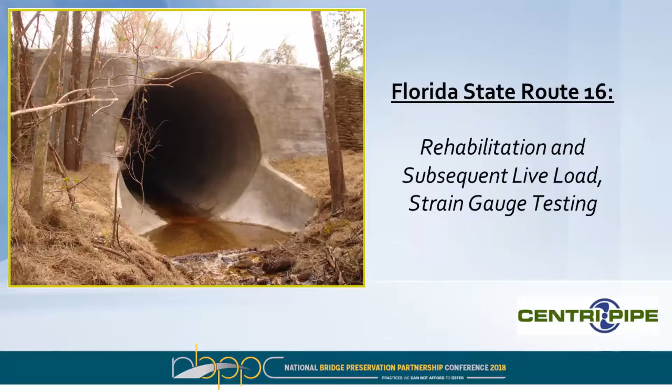The title of the presentation is Rehabilitation and Subsequent Live Load, Strain Gauge Testing, but I didn't really tell you what it was about. You might have figured we fixed something, but didn't really know what. So I'm here to relieve that tension and tell you we're here to talk about culverts.

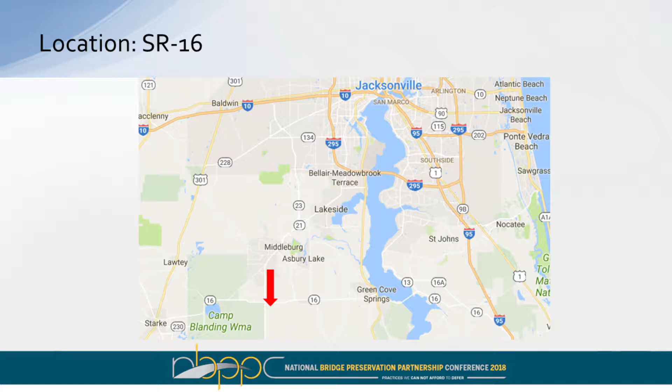One culvert in fact that we worked on 6 or 7 years ago in 2010, out on SR 16, located about an hour southwest of Jacksonville, not too far from here. Back in '08, Tropical Storm Fay crossed Florida and over about 10 days dropped in excess of 28 inches of rain. That kind of rain event will expose hidden or underlying defects in your storm drain system.

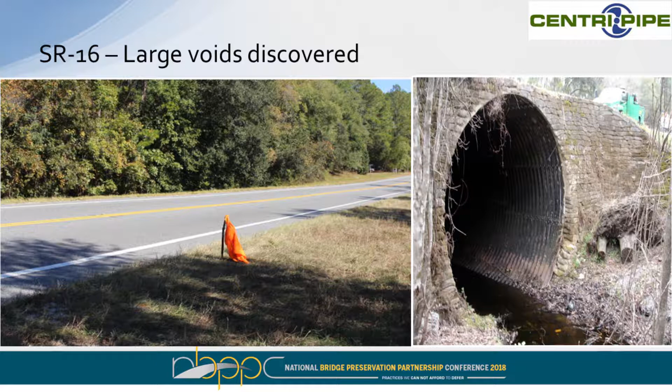This is a photograph of the two-lane rural highway that is SR 16, heavily traveled. The flag you see on the left is top dead center of the crown of the pipe. What's extraordinary about this pipe in particular is that it has less than a foot of cover over the crown.

They discovered the large void, as the story goes, when a state patrol officer stopped over the culvert and was evidently writing someone a ticket. His car suddenly broke through the pavement and landed just right on top of the culvert. At that time, further investigations were done, and they determined there were large voids caused by defects in the invert of this culvert that were piping soils from the upper levels and removing them through the flow in the stream.

So FDOT did a thorough investigation. They examined different means of rehabilitating this pipe, or digging it up and replacing it. Ultimately, to cut to the chase, they selected to use a fine aggregate composite concrete, or FACC, lining to stabilize these defects in the pipe and prevent the soil piping issue that was going on.

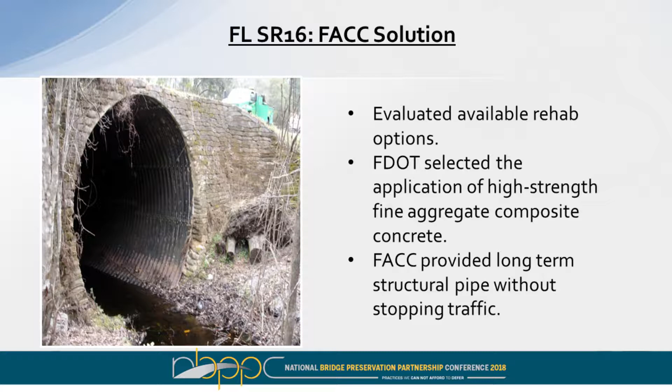Causing instability in the soil envelope around this structure, the main reasons and attributes they chose this solution: it was minimally impactful to traffic flow patterns on this highway—we didn't even have to do a lane closure. It provided a long-term service life with this type of technology, and it's a fully structural, independent pipe within the existing pipe.

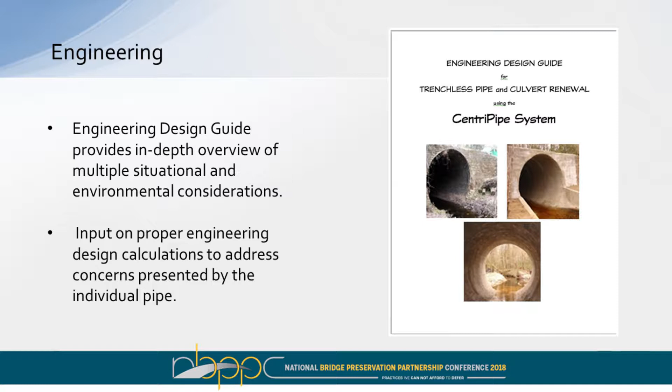So in considering these types of systems, and there are competitive systems on the market, you want to make sure the manufacturer can provide you with an engineering design guide that gives in-depth situational conditions on how to deal with those situations in the environment of the pipe itself. You also want them to provide input on engineering calculations to deal with various concerns present in that pipe's in-situ condition.

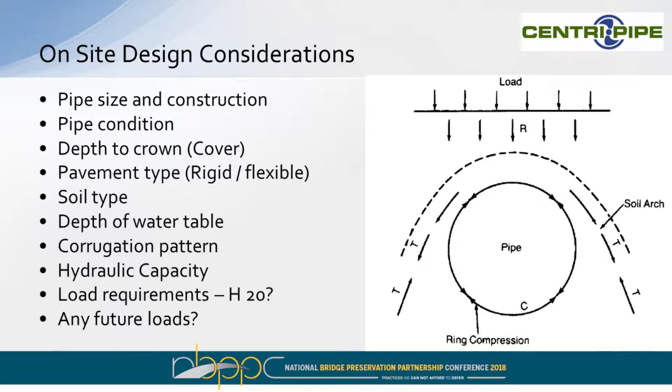So in designing the minimum lining thickness on these liners, we want to look at certain characteristics in the on-site conditions. We want to look at the pipe size, obviously, and construction—is it a corrugated metal pipe? Is it a multi-plate? Is it a reinforced concrete pipe? What is the shape of that pipe? We also want to analyze its current geometry.

It could be deformed. We want to look at the pipe condition, the depth to the crown, and pavement type—is it asphalt or concrete, which distributes live load differently? What kind of soil type encases this pipe? We also want to look at the water table, corrugation pattern, and hydraulic capacity—do we have any capacity left, or are we at the tipping point? And then also load requirements: what is the load, if it's a paved surface, what is it rated for, and any future loads that could possibly be induced on the pipe down the road.

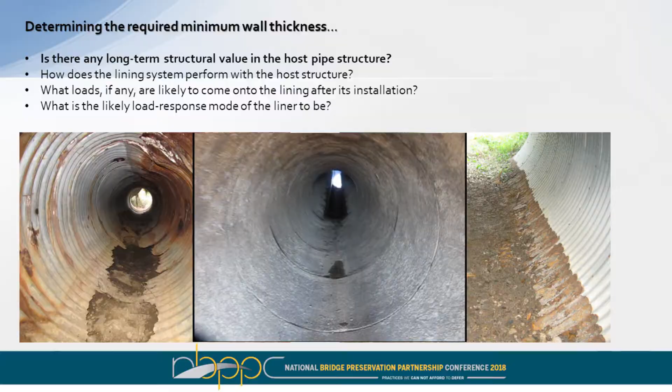So in determining the required minimum wall thickness, we want to see if there's any long-term structural value in the host pipe structure. With corrugated metal pipes, typically we'll use a fully deteriorated design model, so we're not assigning any structural value to that pipe. Even though the pipe may still be functioning in quite a deteriorated state, like the picture on your left, they still hold shape and function for the most part—there's shape holding, in other words.

In a concrete pipe or a brick structure, we will actually, depending on the deteriorated state of that structure, assign a structural value to that structure. So how does the lining system perform within the host structure?

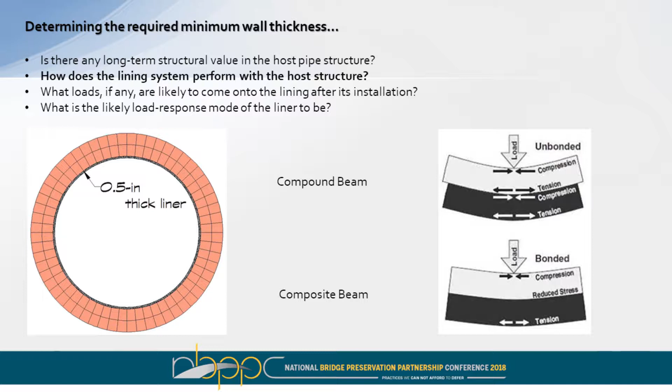Is it going to perform as an unbonded or a bonded condition between the liner and host pipe interface? In an unbonded state, it's going to be a compound beam, which obviously puts more stress on that interface. A bonded configuration is going to be a composite beam and is going to be more stable with less stress between that interface.

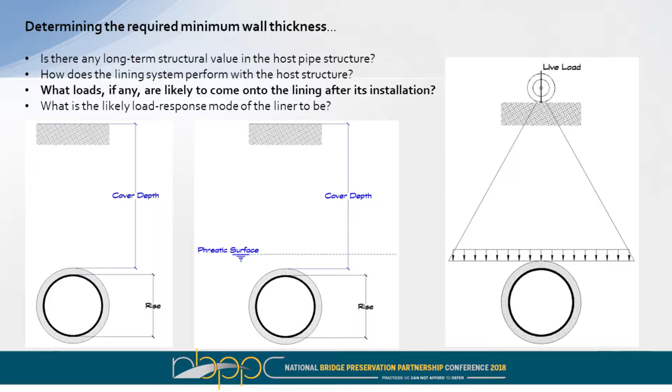What loads, if any, are likely to come onto the lining after installation? We want to look at the cover depth of that pipe and also the diameter or the span. We also want to look at the phreatic surface of the water table because that can also induce pressures on the pipe. And we want to look at and analyze any potential live loads that could come onto the pipe.

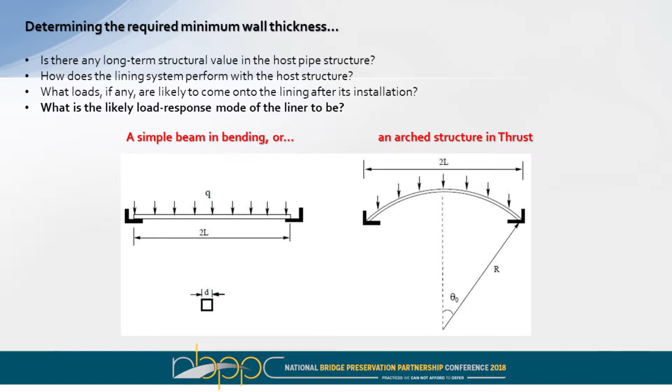Lastly, and probably the most important thing, we want to determine what the likely load response is going to be of this structure. Is it going to act as a simple beam in bending, or is it going to react more like an arch structure and be in thrust? We found that if we can keep our designs in that thrust or compressive stress, we can exponentially raise our safety factors while minimizing the lining thickness and make the lining more economical.

So looking at different FACC lining materials, we want to look at the FACC mix design's physical properties, and these are properties that can be published on paper, but they're black and white. We don't necessarily know how the material is going to perform in the structure itself.

We also want to look at the application methodology. Depending on how you install that material in the host pipe, you can harm or improve those physical properties that you have published on that material. Obviously, we want to look again at the existing soil structure interaction system, and that's how the existing structure is behaving with the soil envelope that it's in.

And obviously determining the loads that will be applied after lining takes place. So we're not really designing a lining inside of a pipe, even though it's typically a thin profile. We're designing a self-independent pipe within a pipe.

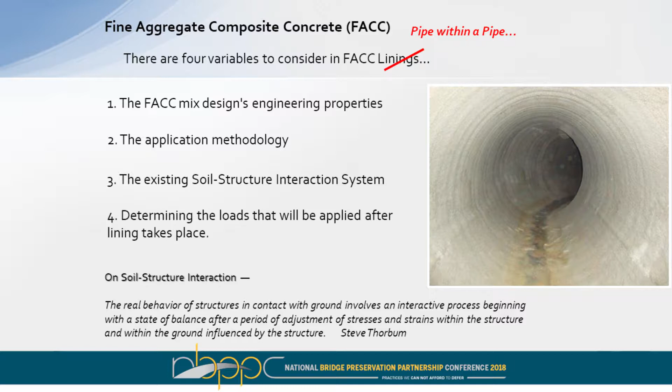On soil structure interaction, I'm going to read you a quick quote here: the real behavior of structures in contact with ground involves an interactive process beginning with a state of balance, after a period of adjustment of stresses and strains within the structure and within the ground influenced by the structure. A buried pipe, when installed by open trench, is going to come upon its greatest stress right after burial. And after a period of adjustment, those stresses should balance out and you should reach a state of static equilibrium.

Some of the physical characteristics that are important in the FACC lining: we want to look at the modulus of elasticity, the flexural strength, the thin shell toughness - and I'll go into that in just a minute - permeability, freeze-thaw performance, the thixotropic nature of the material, and you want to have an internal crystalline membrane technology.

We are talking about a monolithic concrete structure here, so any hairline cracks that could develop over time, we want to have a technology present that's able to autogenously heal those cracks with the presence of water.

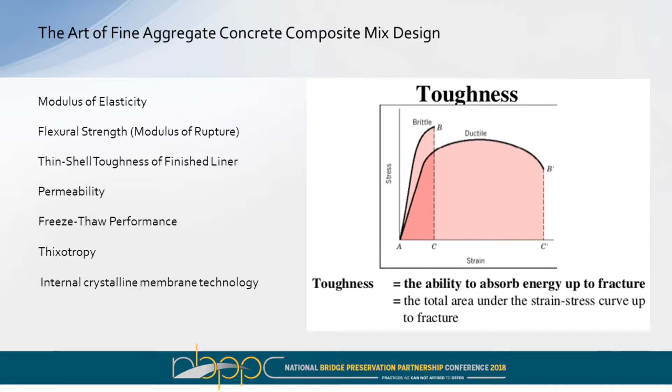Looking at these physical properties, we see in this graph you can have a material with very similar modulus of elasticity, but they behave completely different up to the point of rupture, or modulus of rupture. What we see in a brittle material is a high strength gain, but then once you hit the modulus of rupture point, you have a complete strength loss.

What we want is a material that has some ductility that's able to absorb that energy, and that's how we respond to toughness. That thin shell toughness is the ability to absorb energy up to that point of rupture. That's a better indication of how that pipe or lining is going to function in the ground with a semi-rigid host pipe configuration or in a reinforced concrete pipe situation.

So in analyzing the corrugation profiles in this particular pipe, we had a 2x6 bolted multiplate. The way we calculate the minimum lining thickness is measured off the crest of the corrugation. The material that we use to fill in that corrugation, all of that material in the valleys, adds to the structural integrity of the pipe lining, but we don't consider it in our engineering calculations.

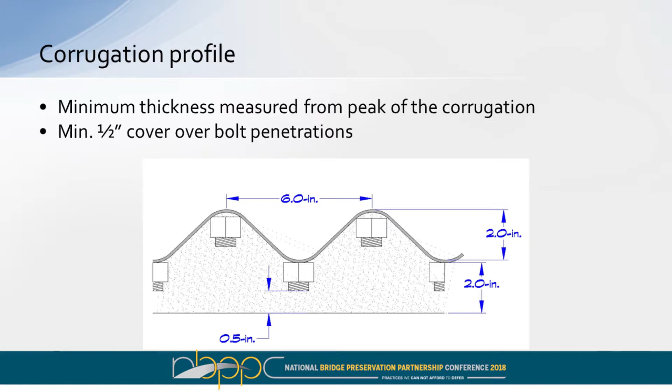It's all based on the peak measured inward. Also, any penetrations in the pipe, like bolts, we have to have a minimum of a half inch of cover, and that's going to prevent any star cracking that could occur directly over the tops of those bolts.

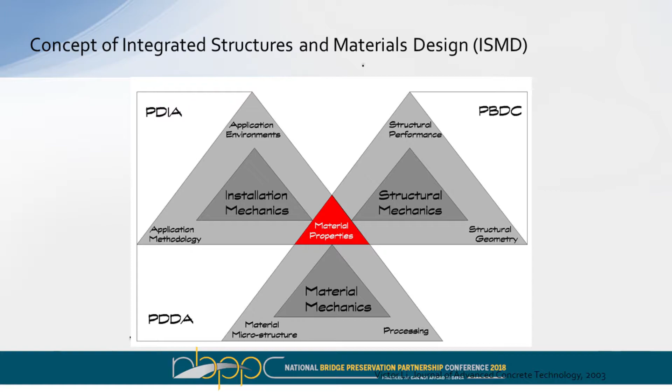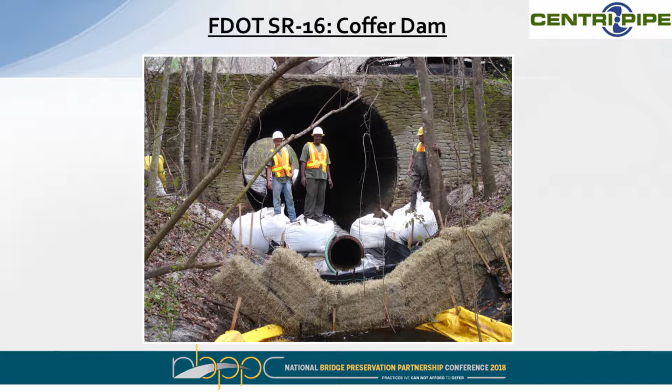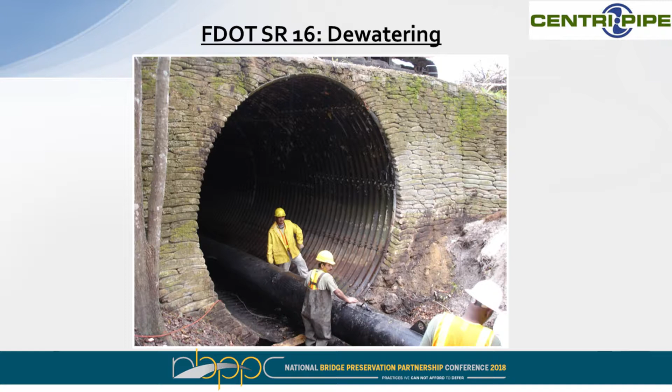FDOT wanted to maintain the creek flow through this pipe, so we used a cofferdam and an HDPE pipe to segregate the flow within it. Here's another shot of it. We were able to work within the confines of the pipe without the influence of the flow. We also added channelization devices: wing walls, approach slabs, and exit slabs on the structure to help channelize the water through it.

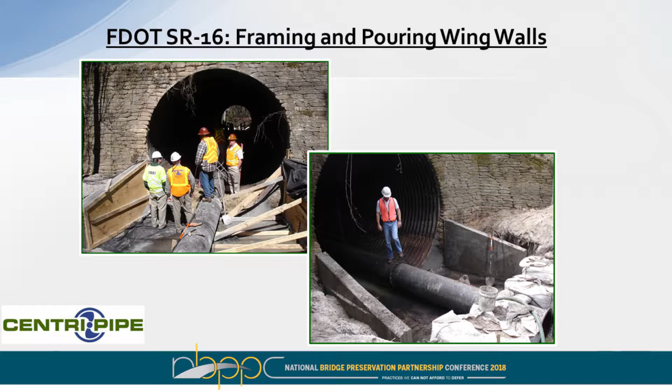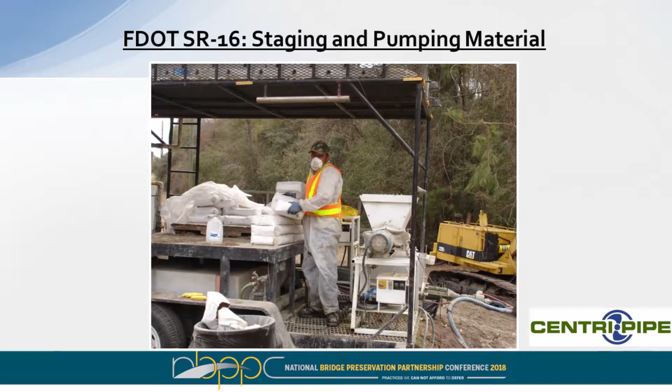The equipment we use for this process is modular with a small footprint, so we rarely impact normal traffic flows, or we minimally influence them. In pipes greater than 10 feet in diameter, we typically hand spray the material. This is because—I should back up.

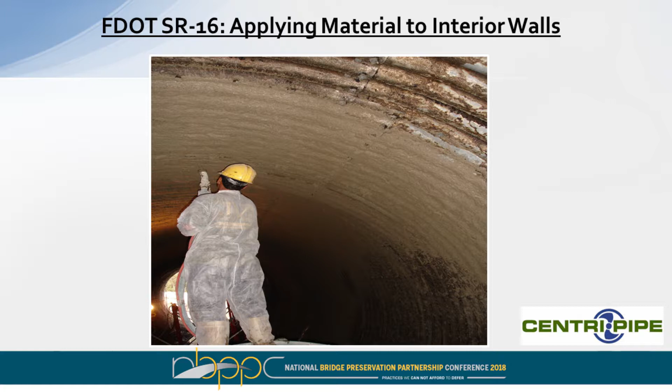We typically use a centrifugal casting process. We have a spinner head that's air operated—we did a demo out front this morning. The material is pumped through a spin head spinning in excess of 5,000 to 6,000 RPMs, and it's distributed against the host structure, which compacts and impacts that material against it. In large diameter cases, our fiber package will segregate from the material in flight if it's too far.

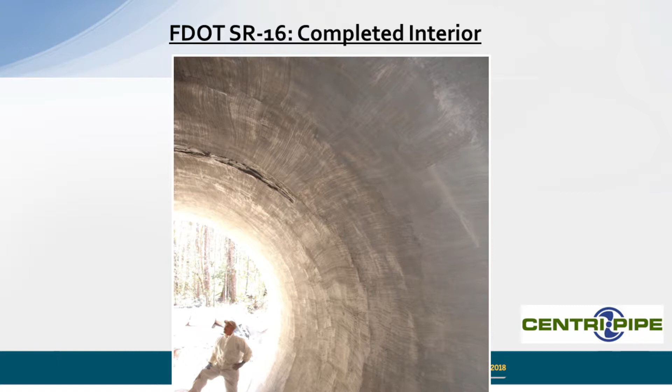So in these structures, we found we can create more density using a low pressure shotcrete application method. The material is gunned on in layers, built up, and then finished by hand. This is what it looked like on day 1, after the structure was completed in 2010. And there's a shot of the complete job—you can really see the shallowness of this culvert and why it's truly extraordinary.

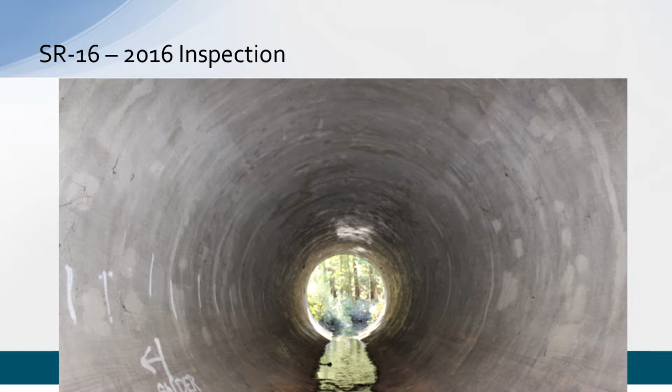In January 2016, I happened to be in the neighborhood and decided to drive by this culvert and walk through to see how it was looking. I found it in impeccable condition. These are shots taken on that day, including the crown directly under the shallowest part of the road—really in terrific condition and performing exactly as designed. This, I remind you, is a 2-inch thick lining of PL 8000 FACC material.

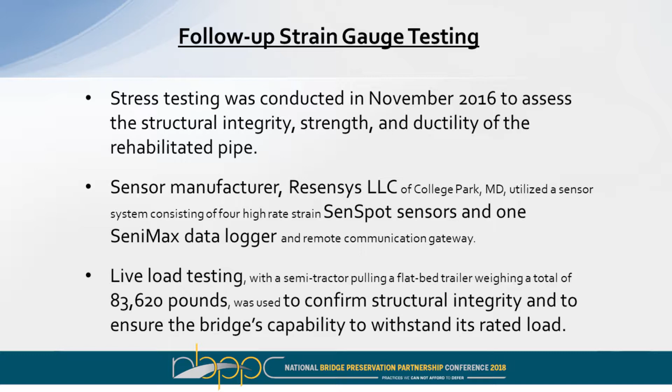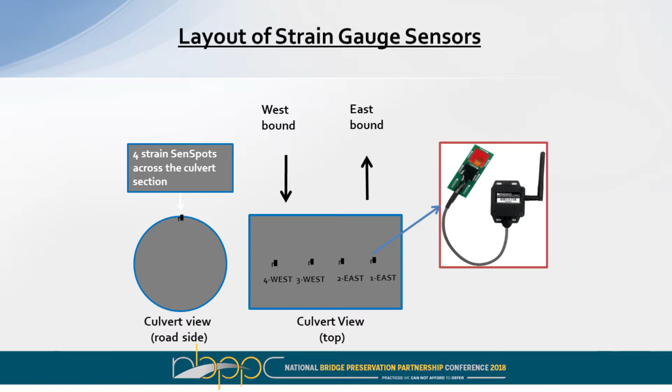It was performing so well, we wanted to understand better how live load stresses influence our lining systems. We found a company up in Maryland called Resensys, and they were able to put high rate sensors in the crown of the pipe. We positioned those sensors right under the wheel loads in the east and westbound lanes of SR16. They're comprised of a full pad glued to the crown, with a transmitter at the end of the wire that sends data to a collector, which then cellularly transmits the data to computers.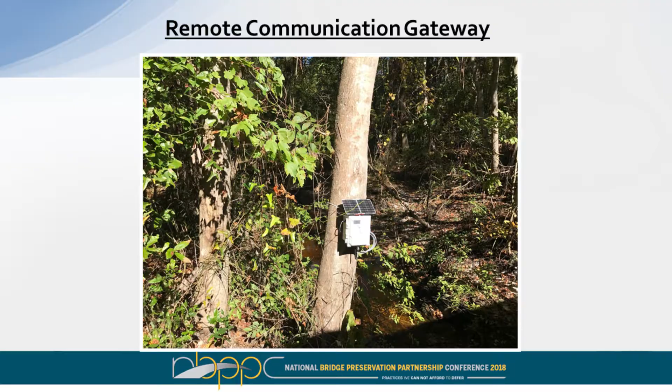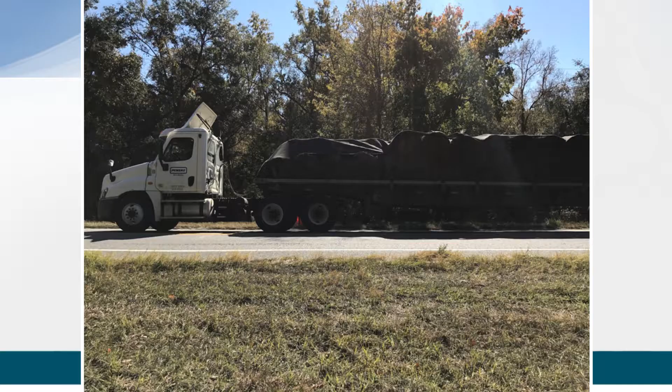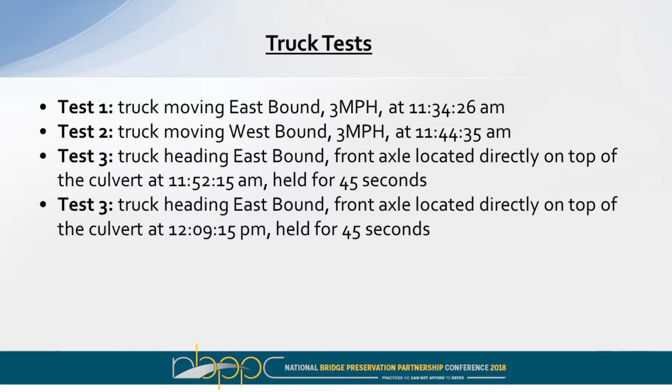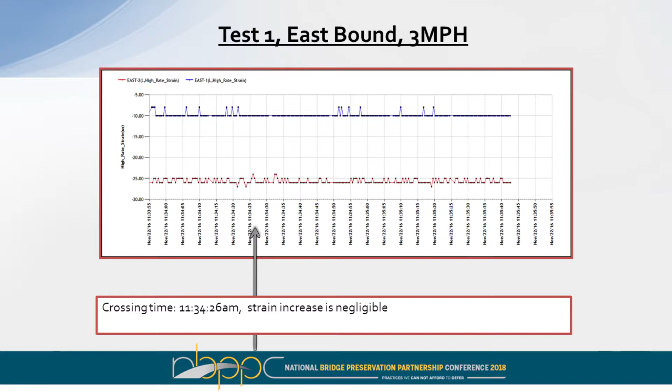I know this is difficult for y'all to make out, so I'll interpret it for you. What we found was a strain increase that was completely negligible. In fact, the maximum reading was 6 microstrains. These high-gain sensors were accurate up to 2 microstrains, so we had very little stress or strain increase on this pipe when it was loaded.

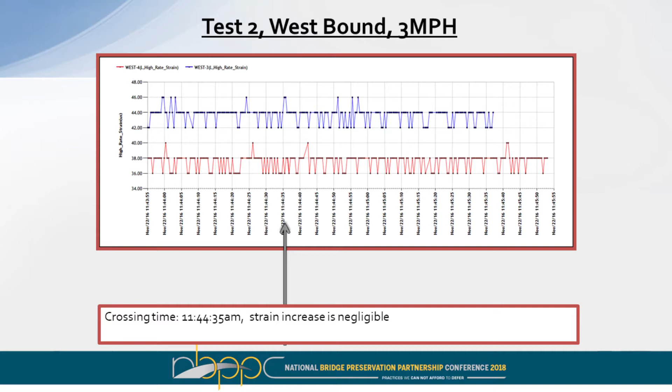This is at 3 miles an hour, east and westbound, and then a dead stop on top. You can see the spans there from the arrows depicted beneath the graph. This was a moment in time when the trailer wheels were positioned dead over the top of the pipe, and again, very minimal strain on this pipe.

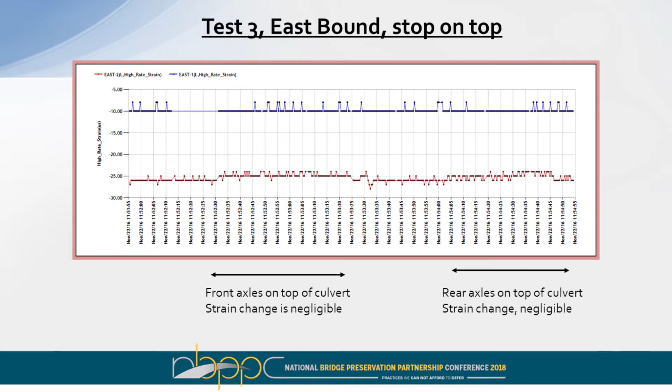So in summary, you want to make sure you select a FACC lining system that can deliver the performance required by the design of the proposed liner. And really, experience is what you're looking for—proven experience in the field.

You want to confirm the existing pipe structure is in static equilibrium in its current geometry, and include appropriate repairs to correct voids. Determine the dead loads and live loads likely to come onto the soil-structure system. Consider load response—will it be in simple beam or will it be in thrust? And then you want to have third-party evaluation of the materials you're going to use.

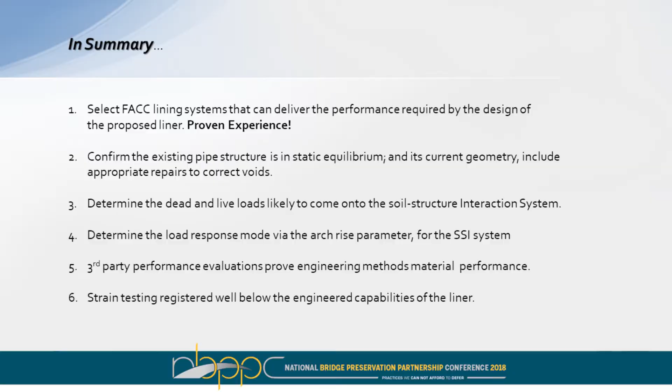Lastly, the strain testing that we did proved that this lining system and our design methods are performing well within the design capabilities of the liner.

How long does it take to do the process? Depending on ambient temperatures—down here in the summertime, we can do a single pass through a culvert and repeat that process in as little as 2 hours. We get about 4,000 PSI in 24 hours, so it's a pretty high strength gain material.

Another advantage is if you have a weather event while we're in the process—we have to do bypass pumping in many cases, like this one. If a weather event happens, we can simply pull out of the structure, let the weather event pass, let the water drop, and then go right back in.

Worst case scenario, we were doing a culvert up in New Jersey and a hurricane came through. We had to pull out with 3 hours cure time on the liner, and ultimately it caused no damage. So it cures rapidly—you're creating a pipe within the pipe, and you're not relying on the structure of the corrugated pipe.

How big can the pipe be that you can go up to with non-reinforced? And if it's non-reinforced pipe, how do you ensure the load—I know you do testing for the strain rate—how do you ensure the compressions and that this pipe doesn't collapse in the future?